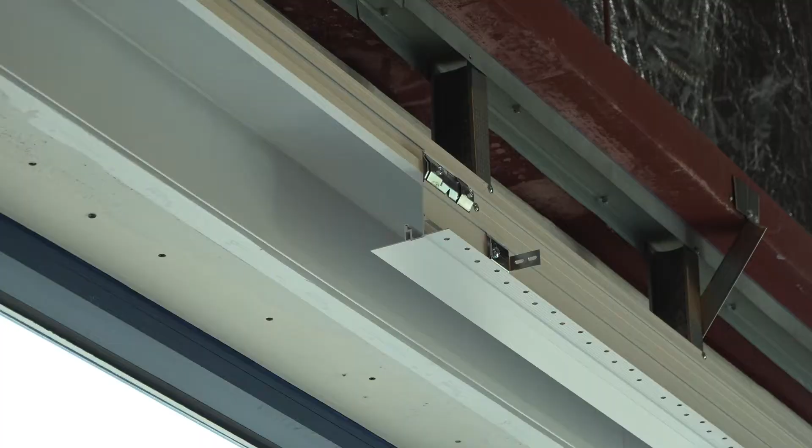Modular aluminum perimeter shade pockets are evolving with how they are purchased and installed. Stick around because you'll want to know how this evolution reduces your initial material costs while speeding up your installations on core and shell projects, then ultimately the tenant finish build-outs.

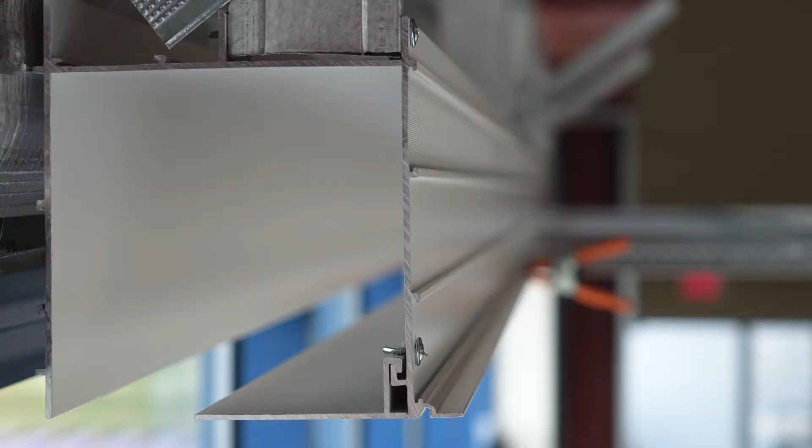Now, on past core and shell projects, you likely installed a typical balanced three-sided 5x5x5 pocket, and the future tenant was left with only one pocket choice to tie their ceilings into. What if the tenant wanted a deeper pocket rather than a 5-inch pocket that you already installed? What if they wanted to tie in a drywall ceiling, but you installed a pocket with an acoustical flange? What if instead of a ceiling, the tenant wanted to tie in a diffuser that seamlessly integrated and ran parallel to your previously installed pocket?

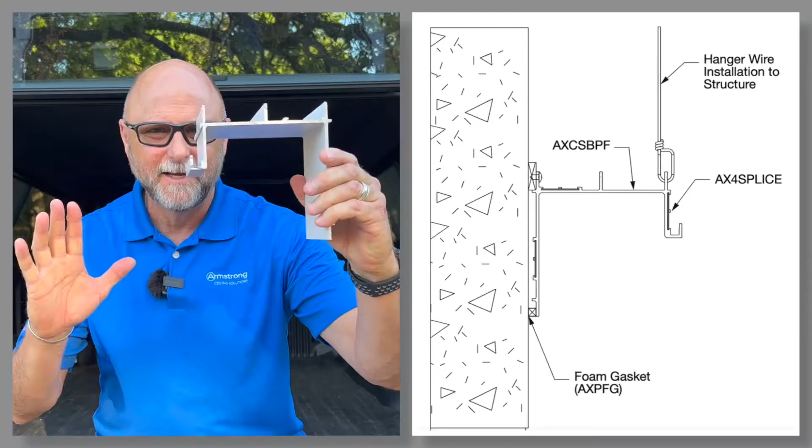With the integration of accessory pieces that tie into a 2.5-sided base, the final tenant can choose multiple pocket configurations to accommodate all types of ceilings in their space. This is a 2.5-sided core and shell pocket base. If you install this along the perimeters of a core and shell project, all design possibilities are available to a future tenant, including shades that fit from any shade manufacturer.

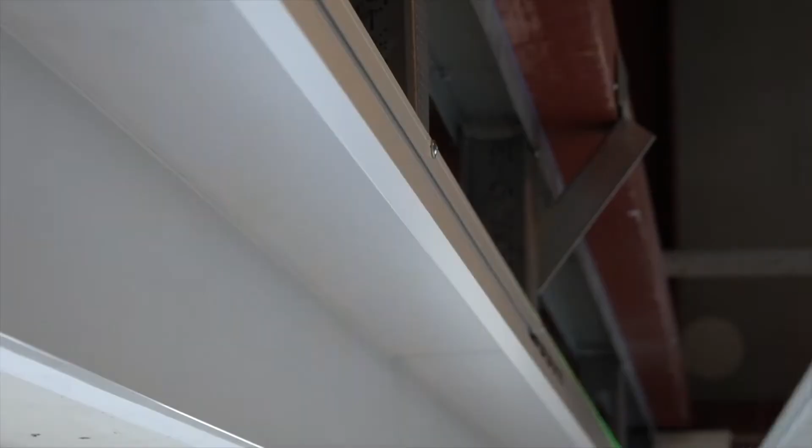For instance, if all the tenant wants is a simple 5x5x5 pocket, that's easy. Simply install the fixed acoustical or drywall or seismic flange trim piece to balance out a finished 5x5x5 pocket.

Now, what if the tenant wants their ceiling to come in lower than the traditional 5x5x5 pocket? You have two options. First, you can order an adjustable trim piece that can be positioned 1 to 4 inches below the base of the pocket. This piece has an acoustical, drywall, or seismic flange and adjusts in 1-inch increments so you can dial in the ceiling height you need up to 4 inches below.

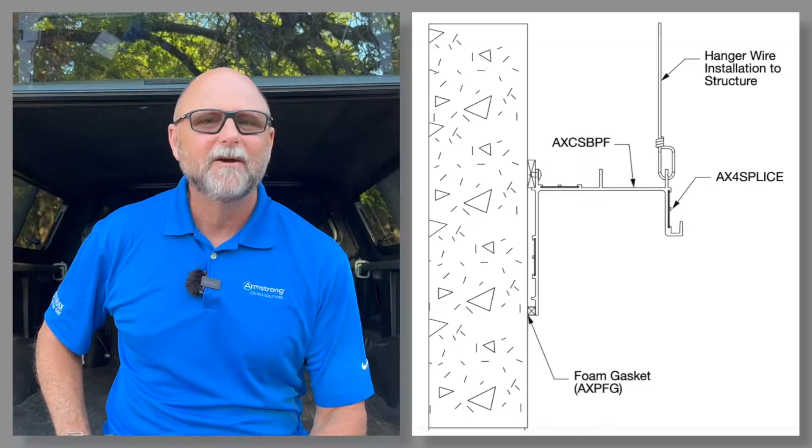If you need an even larger elevation change, we offer non-adjustable 4, 6, and 8-inch drops that connect to your fixed extension clip trim pieces. For example, with this solution, you start with a 2.5-sided base pocket, then add the fixed extension clip trim piece. Last, you add your 4, 6, or 8-inch extension plates for the deepest ceiling elevation changes.

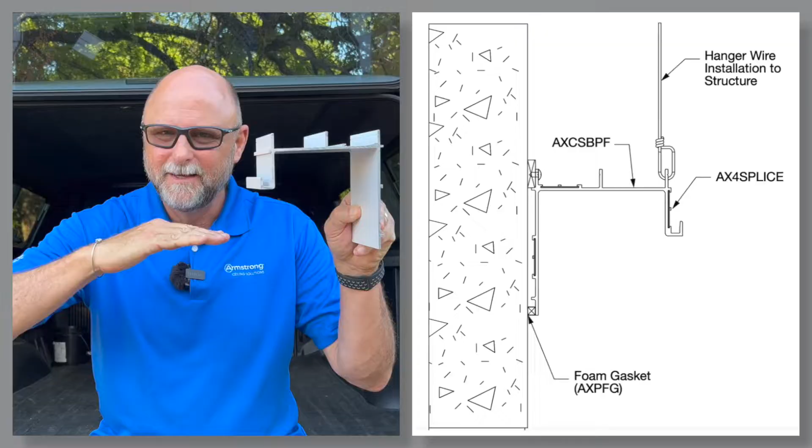But wait, there's one more design option with core and shell pockets. If you need to tie in a parallel diffuser along your 5x5x5 pocket, simply install your 2.5-sided base. Next, you simply install a 4 or 7-inch width diffuser faceplate by hooking it to the base pocket hooks. These diffuser faceplates come in pre-cut single slot or 2-slot patterns for easy integration with various diffuser boots. We also offer unslotted diffuser faceplates so you can cut your own.

Now, doesn't that simplify perimeter pocket construction? One simple 2.5-sided pocket base integrates with so many flush or elevation drop or diffuser options. A future building tenant is not locked in to what was originally installed by the core and shell contractor.